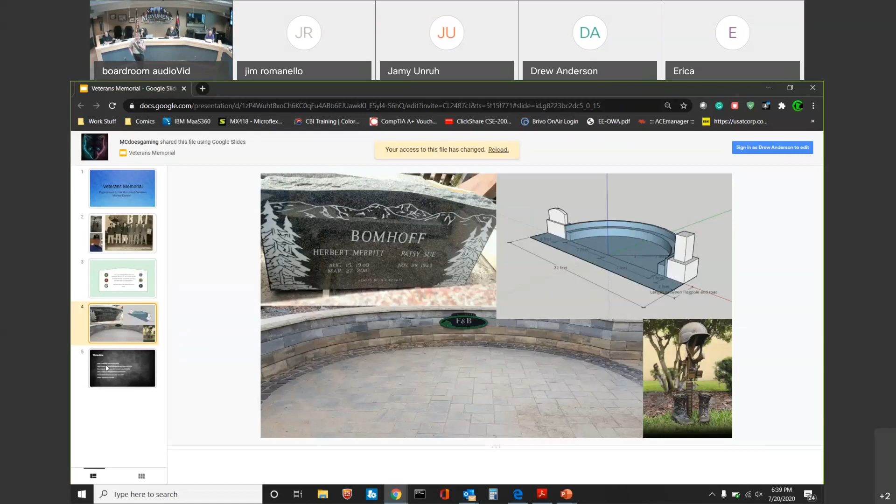So we figured up with a timeline. Our first date is the land prep that the town of Monument is actually doing for us. I contacted Mr. Foreman today, and he said we should have it done by August 20th.

The concrete footers for the monument and statue will be done a couple days after that. After that, we will install the stone bases, which were given to us for about $200, that are about 18 inches tall. They will be put on about 5-6 days after the footers have dried and gotten done well.

The full day of work we're planning on having is the 29th and 30th of August. That will give time for us to get all the stone laid and make sure it looks nice, and get the stone cut. We plan on installing the headstone and hopefully the statue on September 12th, and the ceremony, to be determined, will be around October 3rd. That is it.

I would just like to clarify, how much money have you raised? With the headstone itself being donated and stuff, all funds and in-kind funds - we've raised about $39,000.

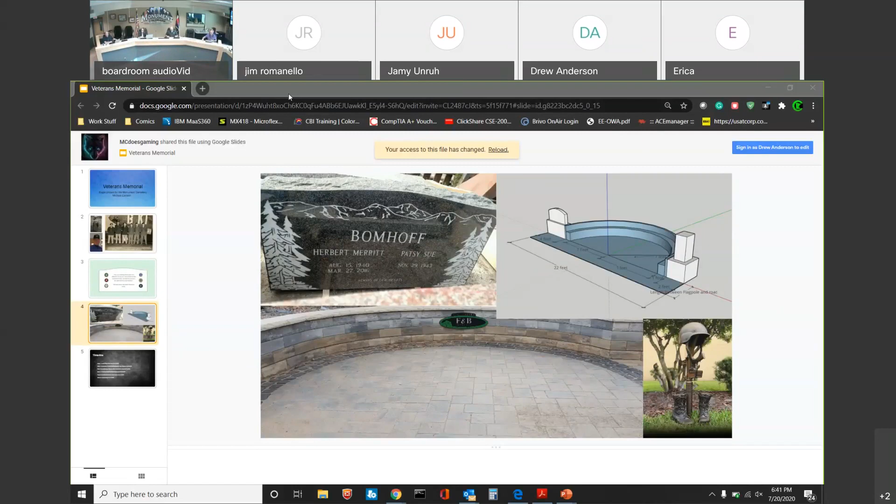Just want to update y'all on the Jackson Creek widening project. As you're aware, Jackson Creek Parkway was completed from Baptist Road to Higbee Road to expand it from a 2-lane undivided road to a 4-lane divided segment. The section of Jackson Creek Parkway from Higbee to 105 is the responsibility of the town of Monument. I updated y'all a few months ago on this. The segment is a 2-lane undivided road that needs repair and widening.

With the approval of village development in 2020, an increased amount of traffic will soon begin to use this section of Jackson Creek Parkway. We will receive in 2020 $800,000 in funding from PPACG with a required match of nearly 20%. This funding will be used to complete the design phase for the widening of Jackson Creek Parkway. In July of 2022, there's another $800,000 available for construction from PPACG with another 20% match requirement. The cost of construction is estimated to be near $10 million, including the design cost.

We expect developer participation in additional PPACG funding, but we still forecast a shortfall in funding. A requirement for using the funding from PPACG requires that the project be completed within 10 years. This would require the project to be completed by 2030 or 2031, and we will work with developers and other funding agencies for additional funding mechanisms, such as public improvement districts, for the surrounding developments to participate in helping fund the widening of Jackson Creek Parkway. Currently, we spend about $10,000 a year on repairs of Jackson Creek Parkway. So be glad to answer any questions that you have on my update.

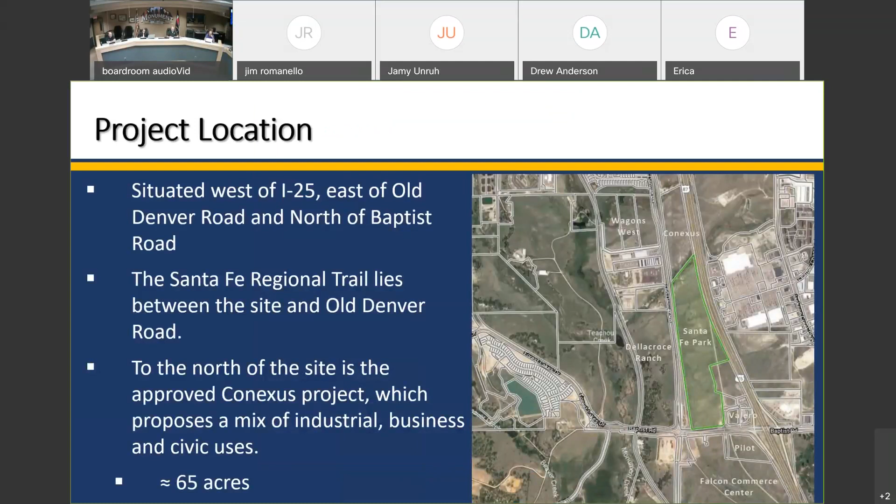Zone change project summary. The rezone from Regency Park planned commercial development and planned industrial development to planned development. Approximately 50 acres of the 64.7 acre property is part of a larger area between Old Denver Road and I-25 that is zoned under Regency Park PID zone. The remaining 14 acres on the south end of the property is currently zoned Regency Park planned commercial development.

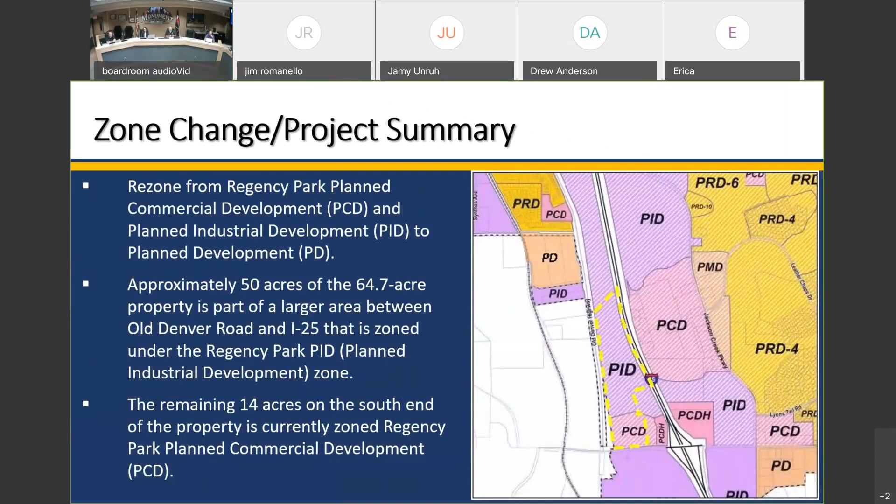The zoning standards and criteria. The maximum building height for PCD area is 100 feet, for PID areas is 90 feet. The minimum building setbacks are the same for both zones and require a 50-foot setback from I-25, a 25-foot setback from the arterial road, a 20-foot from the collector road, and a 15-foot from the local road. Side and rear setbacks are to be determined by the final PD site plan submittal. Maximum lot coverage is 35% for the PCD zone and 40% for the PID zone.

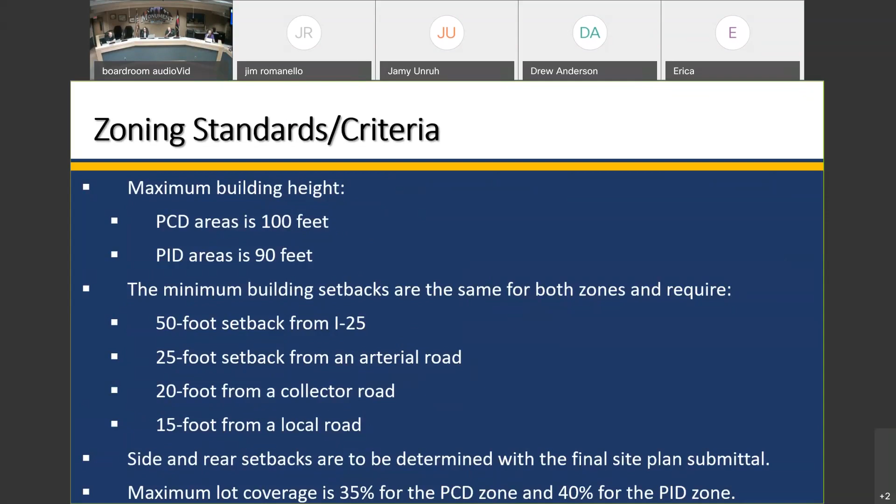The proposed uses are: commercial zone, which will be commercial, office, recreational, civic, light industrial, mini storage excluding distribution center, and multi-use. Commercial and industrial zones, all uses as stated in the commercial zone, industrial, including a distribution center, which could be there.

Phase one of this project will be the construction of streets, remaining utilities, and the detention pond. The remainder of the development will proceed lot by lot basis, and each lot will have its own final PD site plan.

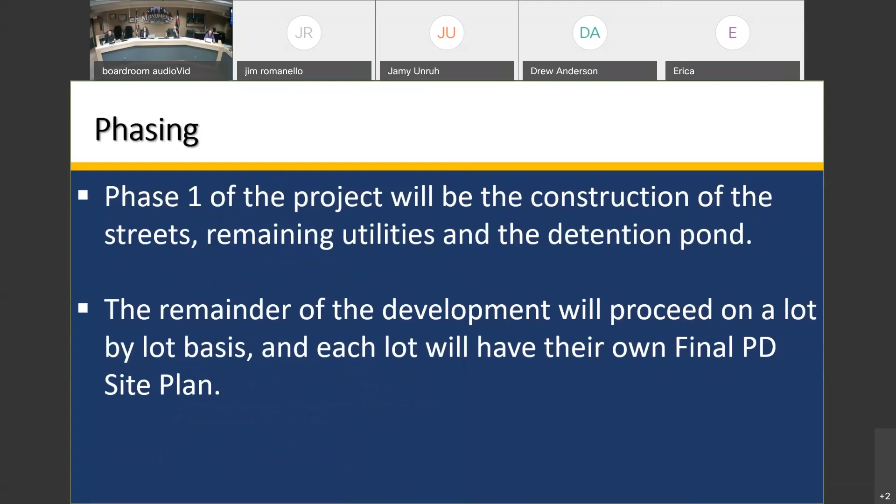Access points. Terrazzo Drive will form the spine road through the development, and it's proposed to add a dual left turn lane from Terrazzo Drive onto Baptist Road. Two new access points are proposed off of Old Denver Road, La Campanada Drive and Baja Drive. New southbound left turn lanes are proposed on Old Denver Road at both of these access points.

The Santa Fe Trail crossings. La Campanada Drive and Baja Drive will cross the Santa Fe Trail. The memo of understanding was dated January 14th, 2008, between El Paso County and Phoenix Bell Associates to allow up to 6 trail crossings. The cost of constructing and maintaining the crossings, including any signage and signalization, shall be paid by the developer and completed in accordance with county standards and specs.

The Planning Commission hearing was June 24th, 2020. No one from the public spoke for or against the project. The Planning Commission voted 5-0 to recommend approval.

The Planning Commission recommends approval of Ordinance 10-2020, Santa Fe Park rezone and preliminary PD site plan, based on the findings that the proposal complies with all standards and criteria for approval, with the following conditions: for the applicant to consider giving pedestrians the right-of-way on the Santa Fe Trail, and the applicant to consider minimizing access points that cross the Santa Fe Trail.

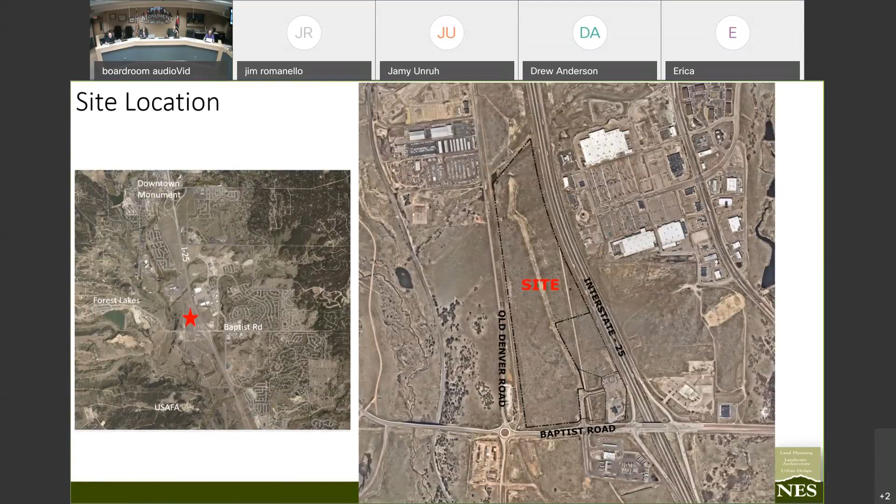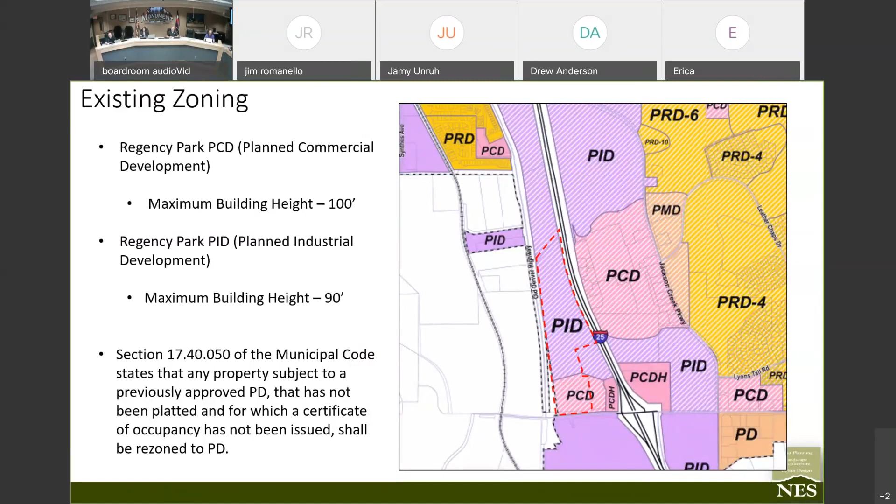Existing zoning, as Debbie explained, is a mix of PID with PCD, which is commercial zoning on the south portion of the property. The maximum heights allowed in the PCD are 100 feet and in the PID 90 feet. The code actually requires a property previously approved for PD development to be rezoned—they won't honor that existing zoning if you want to make any changes, so we had to rezone to PD. That's why we're here today.

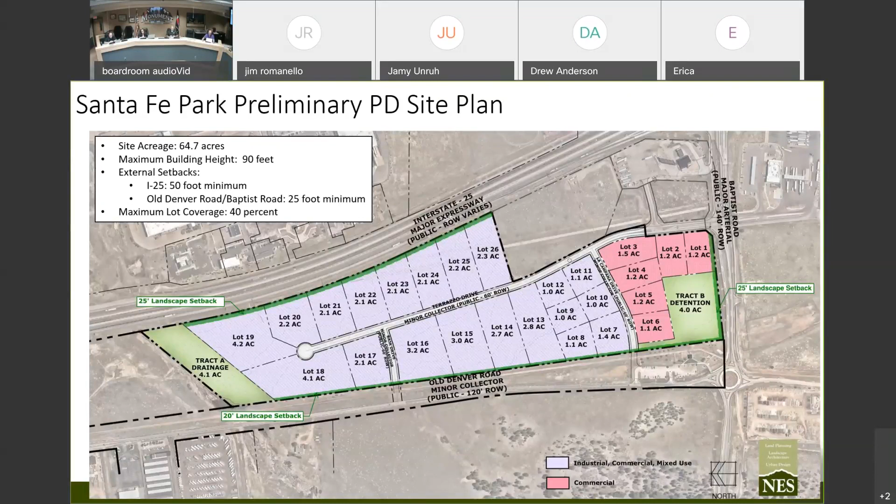The proposed uses have general categories which reflect the approved uses in the existing zones. So you have the commercial areas indicating commercial, civic, office, light industrial uses, then going into a little bit more heavier industrial in the industrial area, including a distribution center.

I just want to pause on the multi-use. What we're considering there is live-work type units. We've seen a demand for that, and generally in these areas residential hasn't been allowed, but we wanted to incorporate that type of facility—a live-work unit where you'd have a garage or office space on the first floor and maybe a unit on the upper floor. We've seen those becoming increasingly popular, so that's the type of development we'd anticipate with a multi-use. No particular guarantee it's going to be here, but we wanted to facilitate that if there was interest.

Now let's talk a bit about access. Debbie went through this, but I wanted to add visual context. This is the proposed access from the site at Terrazzo Drive onto Baptist Road. Terrazzo already exists on the south side to service the Pilot and the future development to the south. We're aligning with Terrazzo, and there will be a dual left turn from Terrazzo onto Baptist Road. Ultimately, when it's signalized—there is planned signalization there—in the interim that would just be a single turn lane.

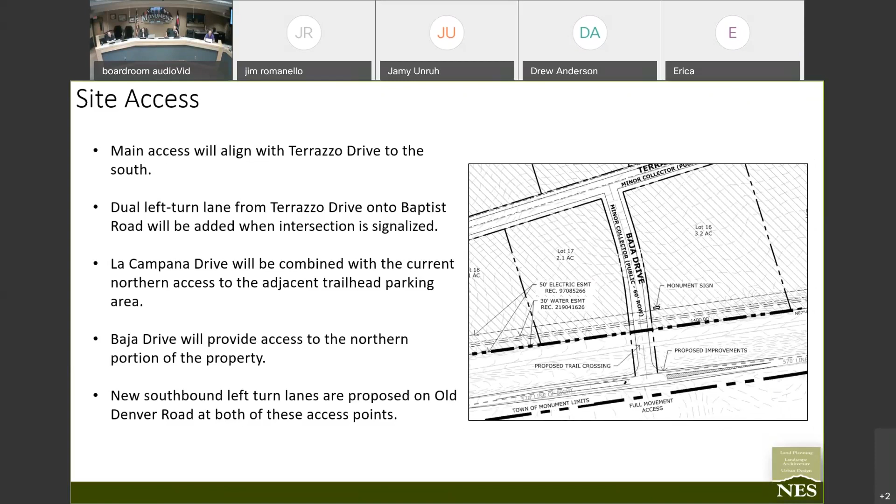Baja Drive is the northern access on Old Denver Road, and as noted, we are going to have southbound left turn lanes at both those access points.

So just at Santa Fe Trail crossing, as Debbie mentioned, there is an MOU in place between El Paso County and Phoenix Bell Associates. Phoenix Bell originally owned the majority of land from Baptist Road up to 2nd Street on the west side of the highway between Old Denver Road and the highway, other than one parcel adjacent to 2nd Street. That in its entirety allowed 6 crossing points.

As you may recall, there's a 23-acre parcel right in the middle that is Conexus Phase 1, which already has 1 crossing point. So this project, the 65 acres, will take 2 of those 6 crossing points, and the remaining 3 will serve the area to the north.

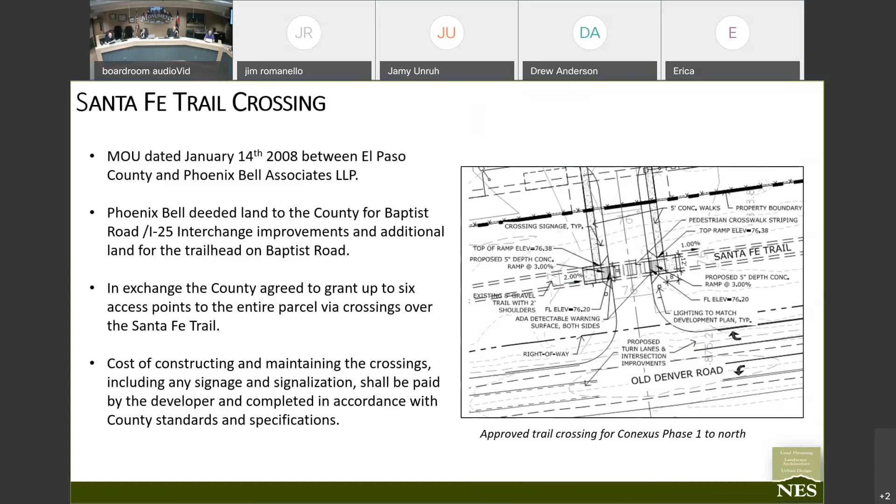The crossing point design has already been approved with Conexus Phase 1, and the intent is to reflect that crossing design per the county specification at the 2 crossing points proposed on Old Denver Road.

The comprehensive plan shows us as commercial center and business campus, which focuses heavily traveled uses on the south side of the project, consistent with our proposal to concentrate commercial in that area, and then more of a mixed-use business park. We're going a little more industrial, consistent with the existing zoning, but it does recognize manufacturing, assembly, and fabrication uses are appropriate, and any outdoor activities will be screened per code requirements.

It also shows park, recreation and trails. We have retained that area in green, which is the northern part of the site adjacent to the creek, as open space.

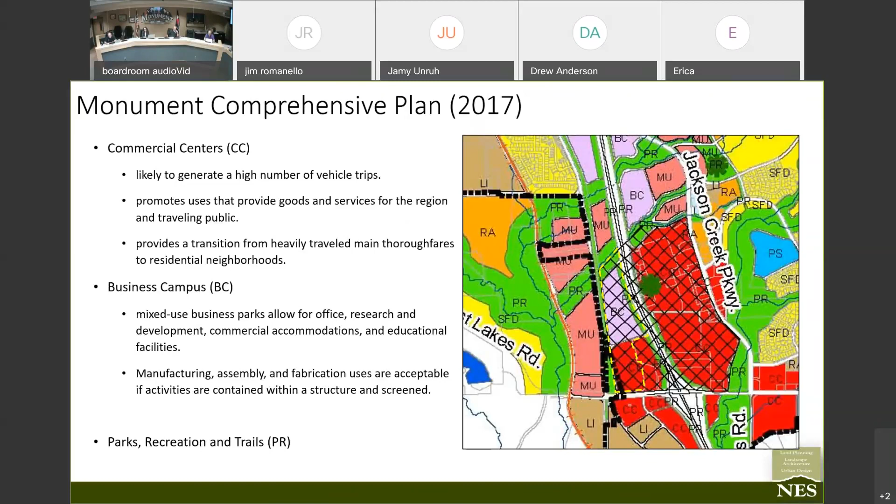Some more specific policies encourage a wider array of land uses, moving away from single-use developments to more mixed-use developments. In particular, opportunity LU-E is to capitalize on the 3 I-25 interchanges for tax-generating uses, which would be consistent with that goal. And generally, opportunity ED-A is to allow Monument to serve the growing Front Range population as a destination.

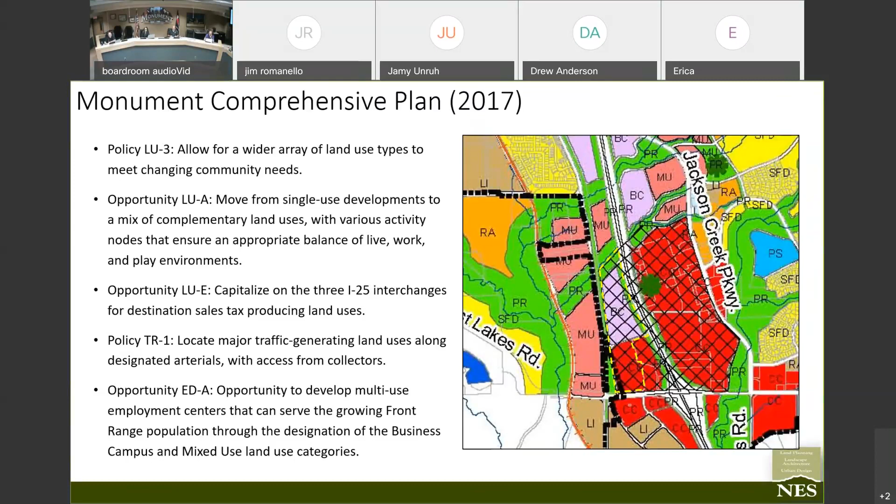Briefly, the preliminary PD site plan review criteria is what we always go back to. We're providing open space appropriate to the function of the project as a primarily commercial-industrial park on the north end, and protecting that natural drainage. We're adjacent to an existing trail system, so we're providing connections to that through the development. Clearly, we'll have a positive fiscal impact by bringing commercial and industrial development.

It's a mixed use. We're encouraging a variety of uses on the site, trying to broaden slightly the commercial and industrial zoning that exists. There really aren't any surrounding residential areas, so our buffering requirements aren't extensive, but we are providing a setback from the trail, from I-25, and from Baptist Road, and providing internal circulation with the road system identified.

Phasing, as Debbie identified, will be the utilities and roads, followed by the development. Utility service is provided by TriView, and the water line is already in. A gas line has been extended to the west of I-25 through a collaboration between various landowners in this area.

Design and architecture will really be dealt with at a more detailed plan stage. The site doesn't have any major environmental characteristics other than the creek, and we're protecting that. The plan is consistent with the town's comprehensive plan.

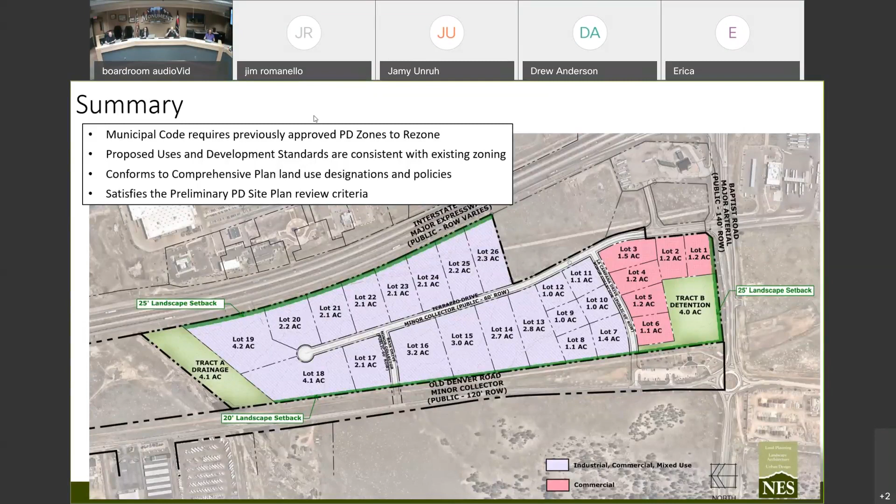At this point, I'll open it up to public comment. Mr. Anderson, do we have anybody online? Ms. Hogan, Ms. Flynn, do we have anybody in the hallway waiting? Okay, then we will close the public hearing portion of this hearing.

We will bring it back to the board for further discussion, additional questions, or a motion. I make a motion for ordinance number 10/2020, an ordinance approving rezoning and preliminary planned development site plan for Santa Fe Park. Second. We have a motion and a second.

Ms. Hogan. Yes. Please move on, Ms. Hogan. I can't hear Miss Hogan at all. Neither can I, I don't know who she called on, but I can't hear her.

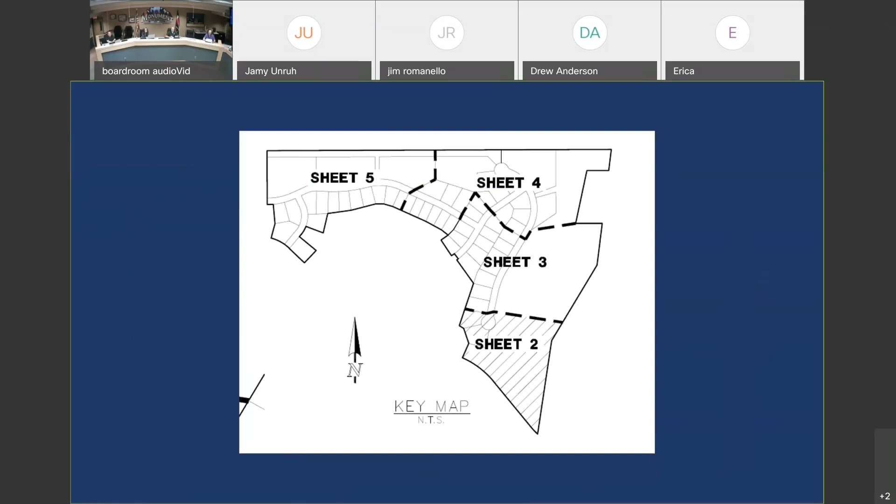Can you go back to the public comments and elaborate on them? Were they addressed and what were they necessarily referring to? Okay, that's fine. Sure. Lauren Moreland, I'm one of the vice presidents at Classic Homes and the project manager of Sanctuary Point.

We had 3 residents from Higbee Estates, which is due north of Sanctuary Point, and I think their lots were actually adjacent to what we're calling filing 7 here. It all revolved around view corridors and protecting sight lines from their perspective. Filing 7, especially on this north end, we made numerous concessions as we worked through the PD site plan to approval regarding connectivity of the trail, a 50-foot buffer between Sanctuary Point lots and the Higbee Estate boundary line. We walked them through that along that particular line, that the topography is really going to dictate the home placement.

It's very steep on some of those lots. Obviously we'll grade the roads in, but there are certain areas where a home, I can't say it's not constructible, but it would be difficult and I don't think appropriate in some of the locations that may have been requested. So I respectfully declined on the record and said that when we have a customer who chooses that lot, any one of the 3 builders up there, we would meet the clients on the lot and walk them through home placement based on topography.

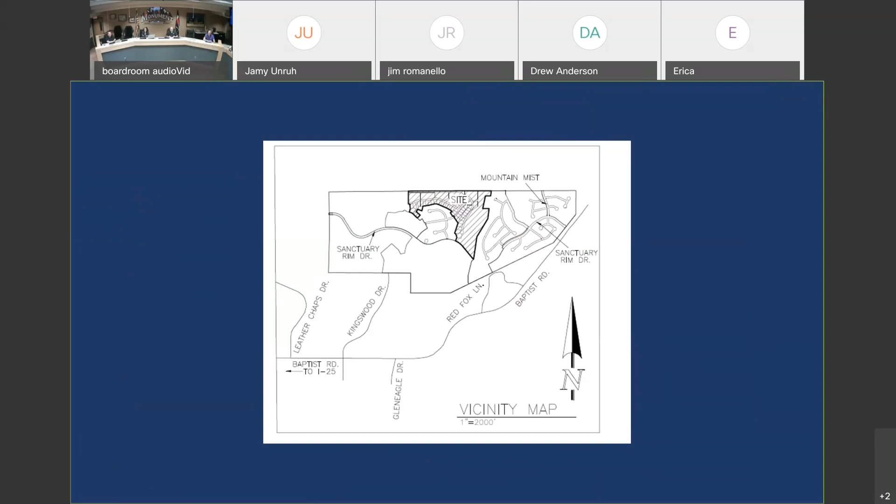Other questions from the board? Okay, this is a public hearing item, so I will open it up to the public. Is there anyone who would like to speak for or against this item at this time? Ms. Flynn, still nobody in the hallway? Okay. At this time I'll close the public hearing portion of this ordinance and bring it back to the board for further discussion or a motion.

I'd like to make a motion to approve ordinance number 11/2020, an ordinance approving a final plat for Sanctuary Point, filing number 7. Second. We have a motion and a second. Ms. Hogan? Trustee LeKind? Trustee Unruh? Yes. Trustee Unruh? Yes, can you hear me? Mayor Wilson? Yes. Trustee Stevens? Yes. Mayor Pro Tem Elliott? Yes. Trustee Romanello? Yes. I'll throw in a yes because we got kind of mixed up. Yes. And Jamy, we did hear your yes.